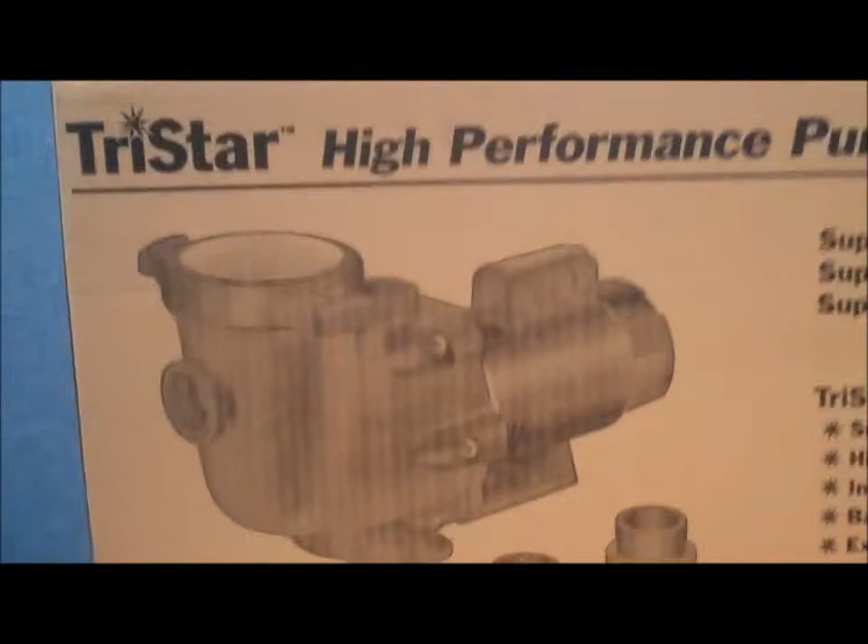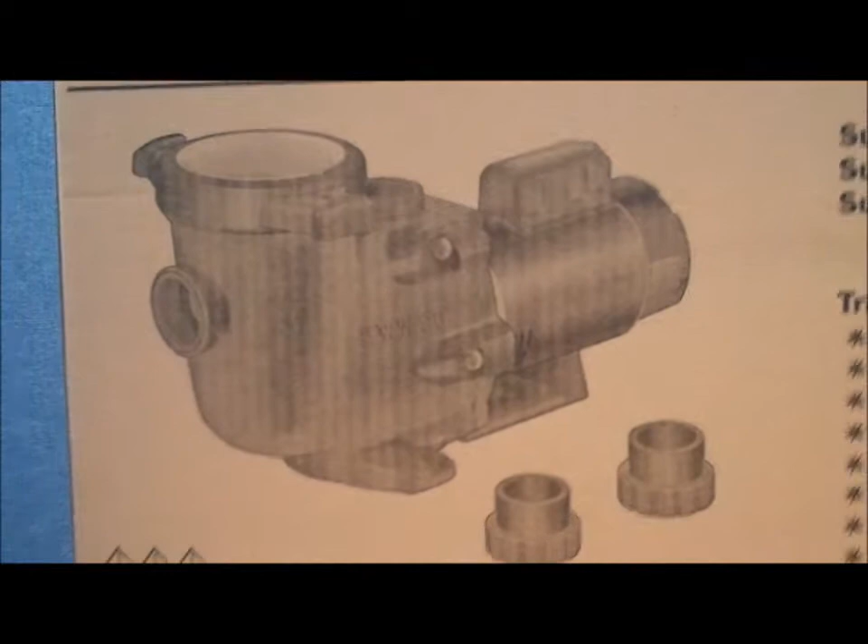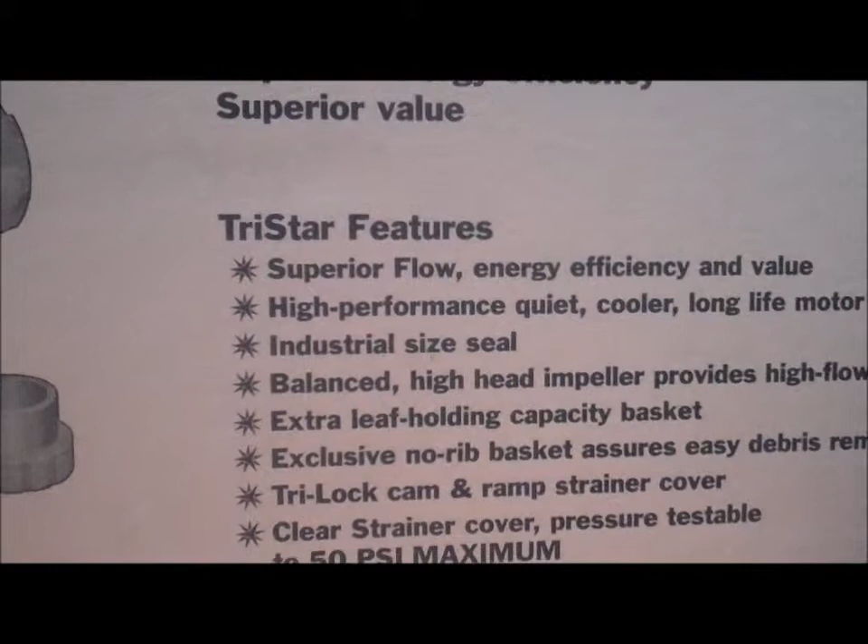Tri-Star is a unique molded design, produces high flow, energy efficiency, quiet operation, a large leaf basket, and a cam and ramp strainer cover.

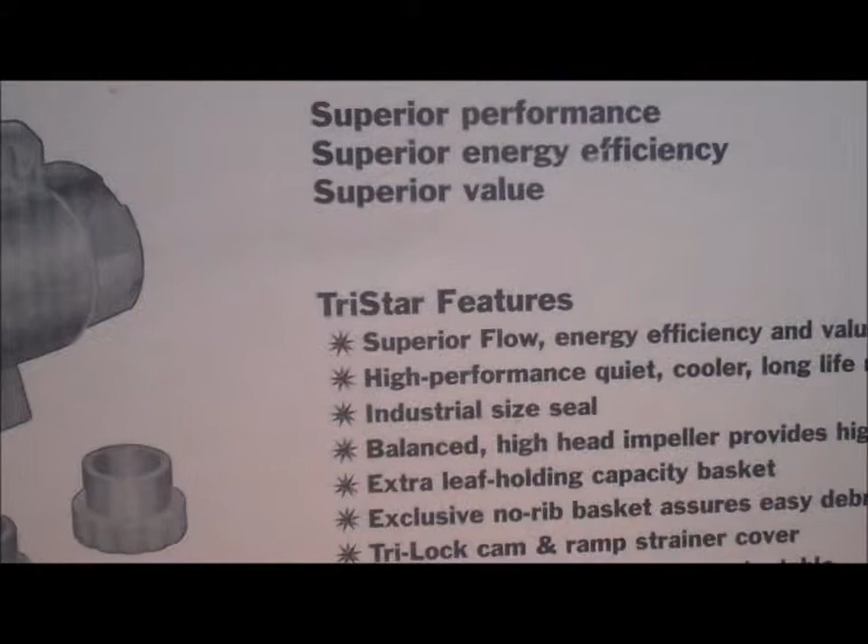The Permaglass XL is Hayward's strongest thermoplastic. This pump was introduced, I think, in 2007 and has quite a lot of installations already around the country. It's UL and NSF listed for commercial properties that require that.

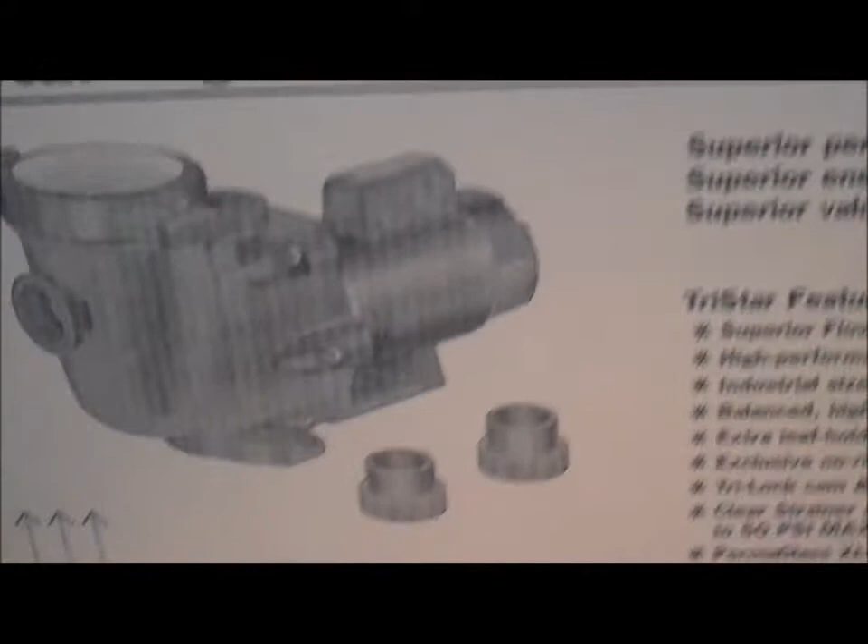This particular model we're looking at is the SP3210X15, and the 15 on the end indicates that it's a 1.5 horsepower Tri-Star. Max rate indicates that it's an uprated motor. For in-ground pools, it includes 2 unions for easy plumbing.

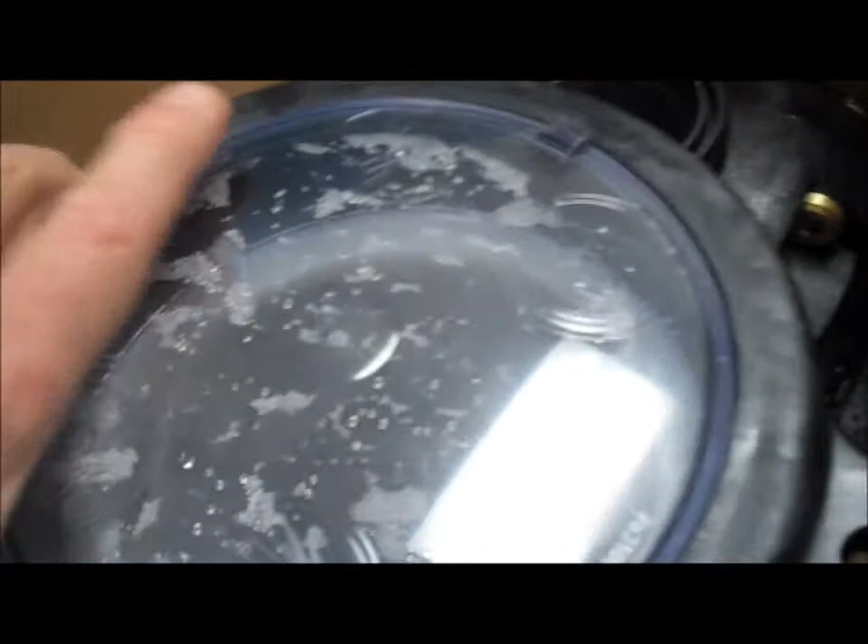Let's take a look inside. Okay, inside the Tri-Star, notice a little moisture on the inside of the lid. It's because every Hayward pump is wet tested. So if you buy a new pump, don't think it's been used, it's just been bench tested by Hayward, and sometimes there's a little bit of moisture left inside.

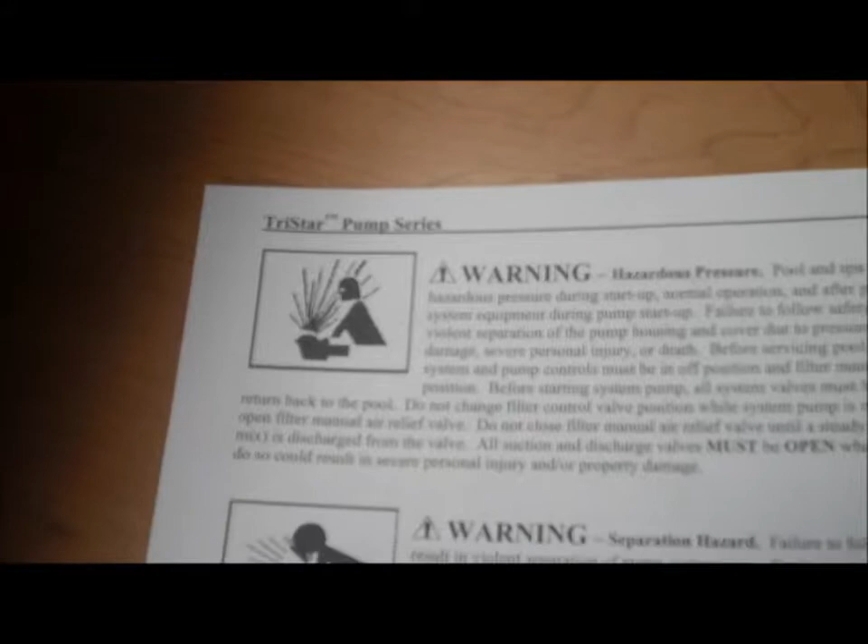First, take a look at the owner's manual for the Hayward Tri-Star. Inside, we'll start with the usual requisite warnings and cautions. There's a lot of hazards to be aware of when you're installing a pool pump - pressurized systems, electrical systems. Make sure you read all of that.

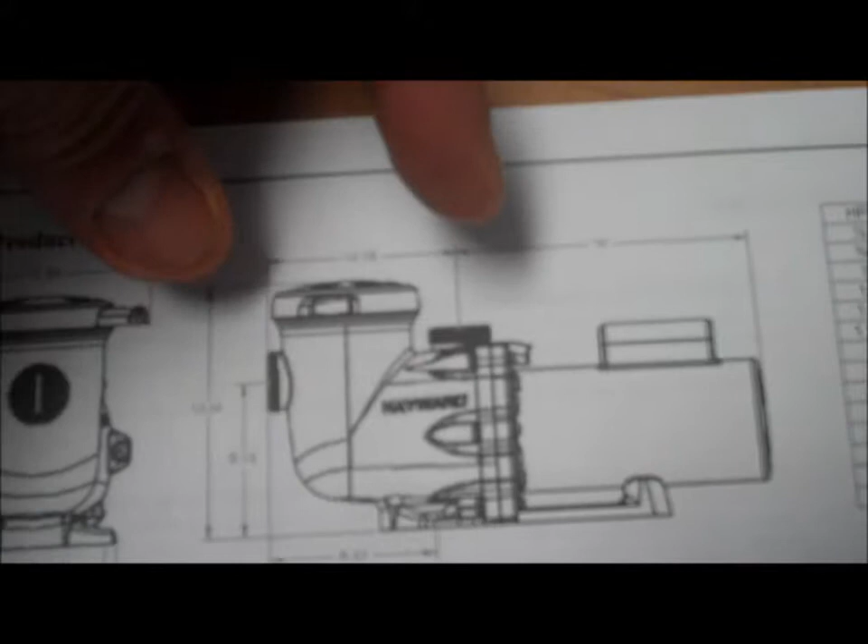We've got the product specs. The spec sheet can be very useful if you're replacing a different pump model with the Hayward Tri-Star, so that you can match the vertical height from the ground to the intake, and then match the horizontal distance from the front to the rear pipe. It's always a little easier plumbing a new pump in if you can get close to these 2 measurements of your original pump.

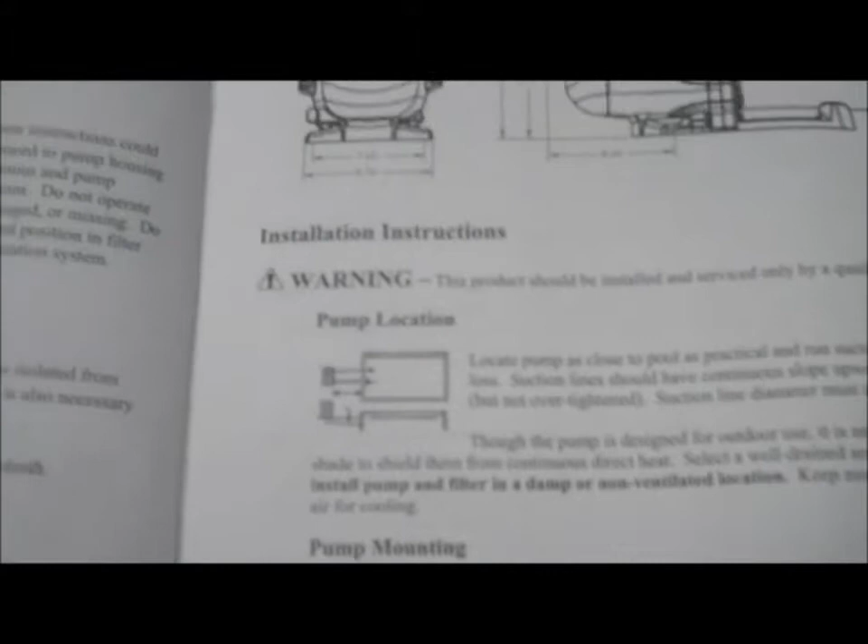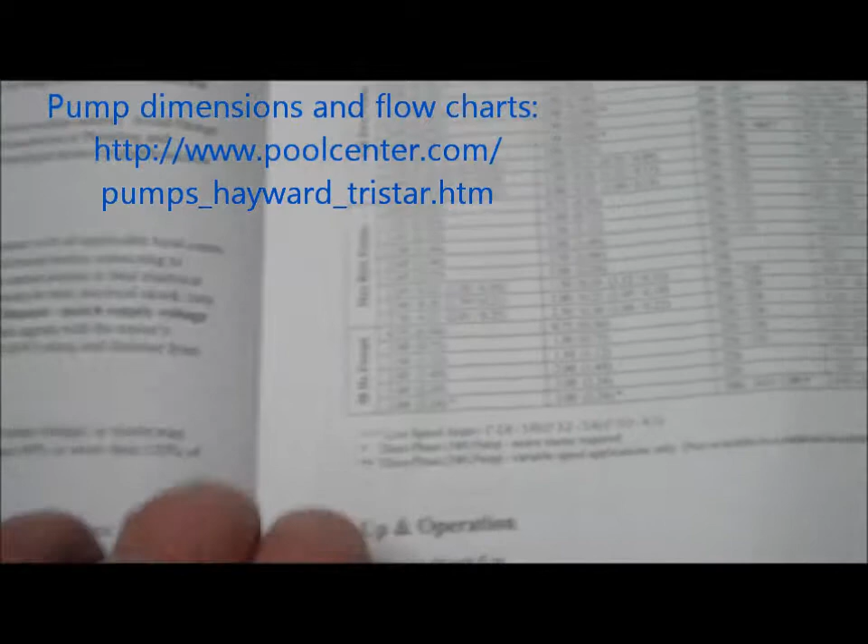And we go on to discuss pump location, pump mounting, pump sizing chart, very useful. Lots of electrical information on the amperage draw of the particular pumps. Maintenance information, winterization information.

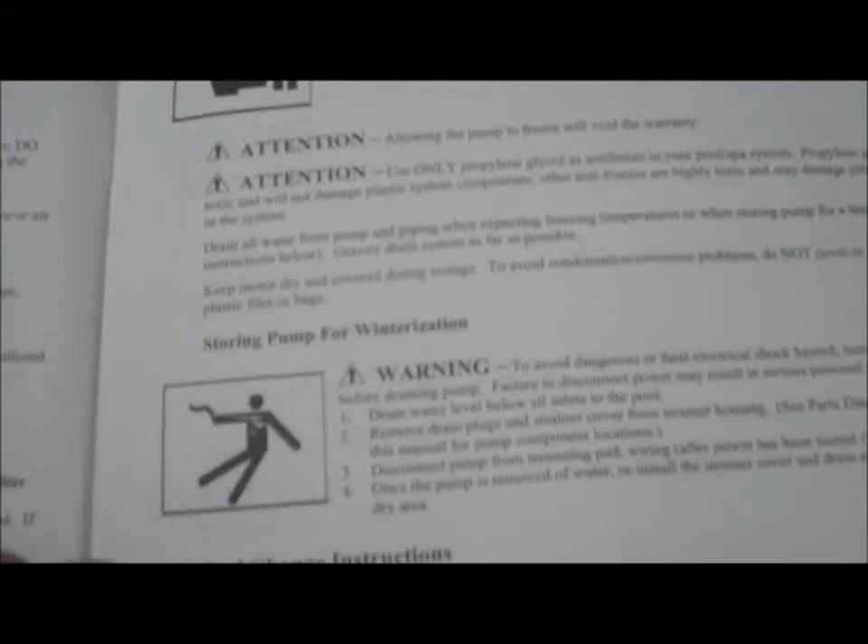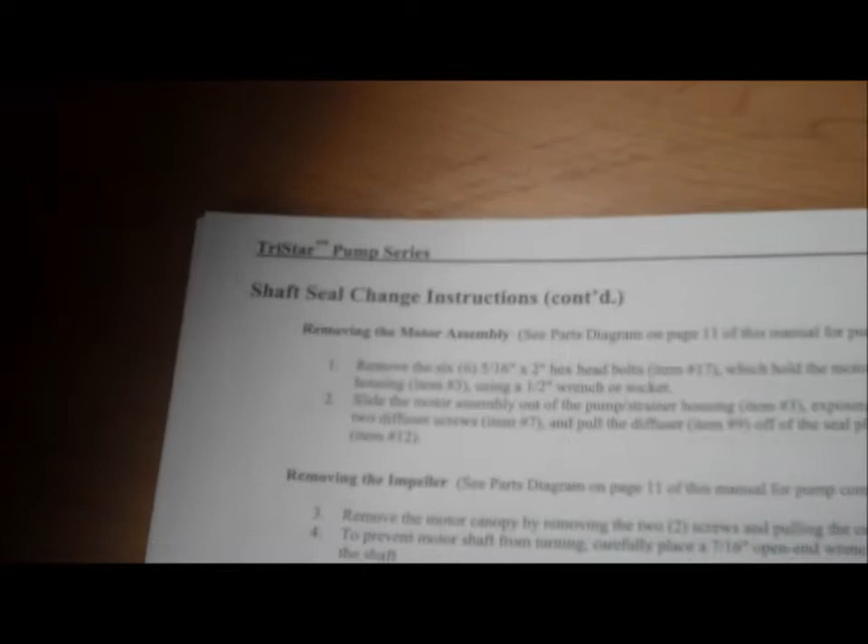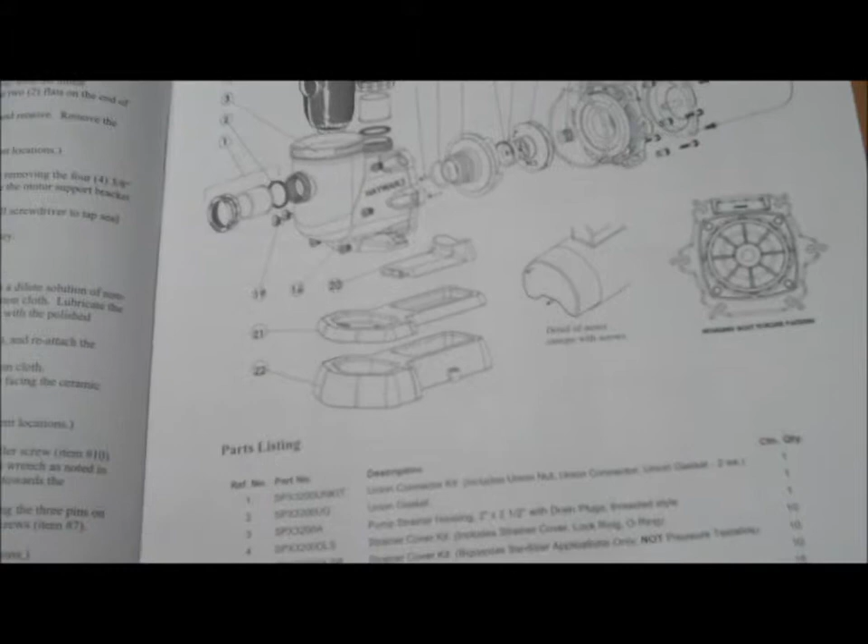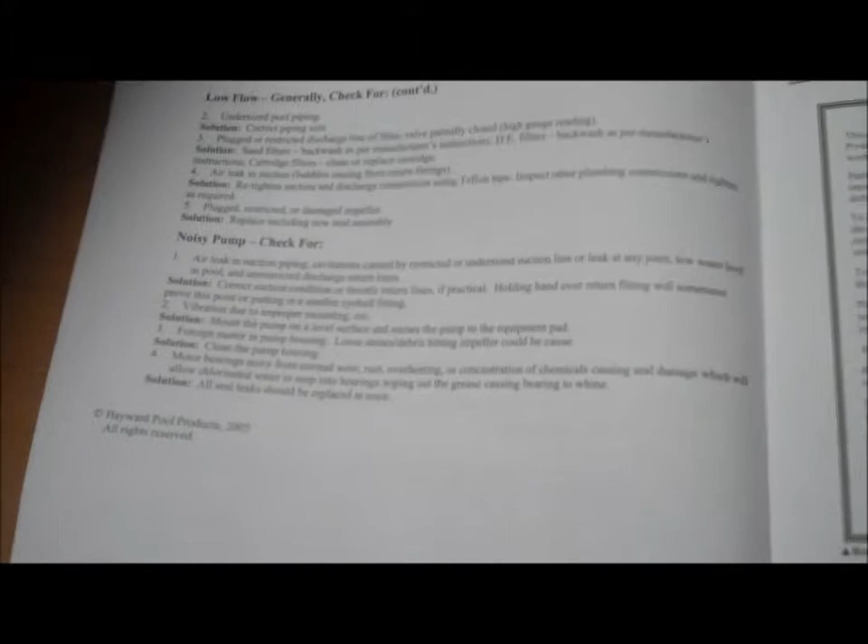We've got about 18 different parts on the Tri-Star, not too many. There's the rest of them. Troubleshooting guide for the Tri-Star motor and pump, and the warranty and the warranty registration card.

What else do we have in here? Here's the unions - 2 unions, 2-inch unions, so you'll easily be able to connect 2-inch plumbing in and out, and the unions make it easy to remove the pump for service or storage during the winter. 2-inch ports, front and rear. If you can go 2-inch plumbing, that would be recommended.

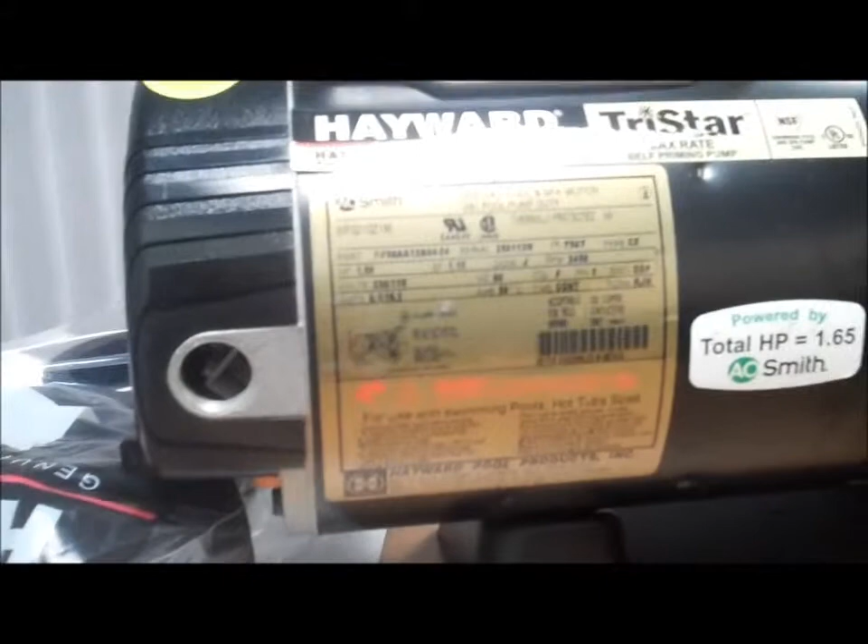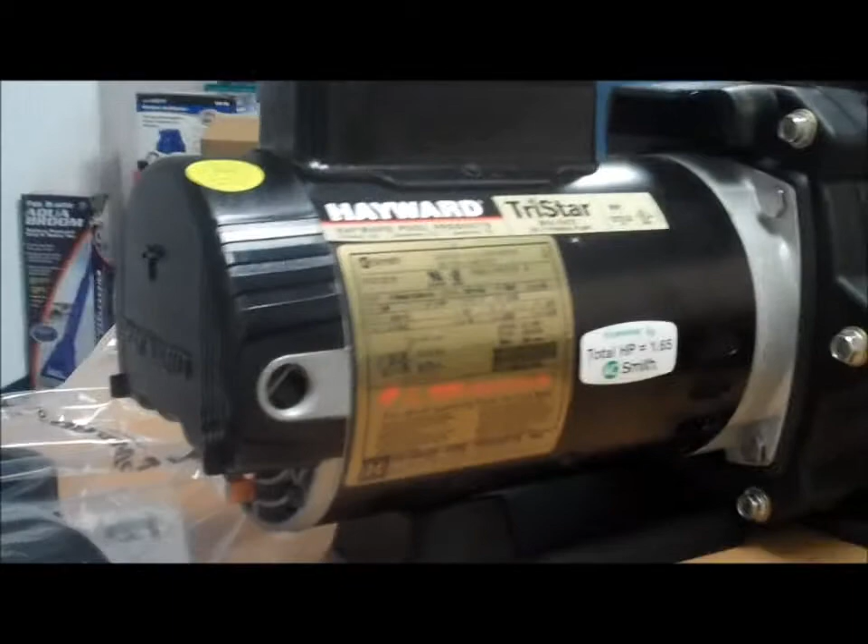This is a high flow pump, and it might be too much power for you, so make sure that you check the charts, the performance curve, and or give us a phone call if you want to make sure. You don't want to put an overpowered pump on your filter. The pump will cavitate, which means it's starved for water, or it could make your filtering inefficient or even damage your filter.

Tri-Star is a monster. Knock off the lid here. Look at the size of this basket - won't even fit in the camera, it's so big. That ought to hold a lot of debris. And yeah, there's a little water down there.

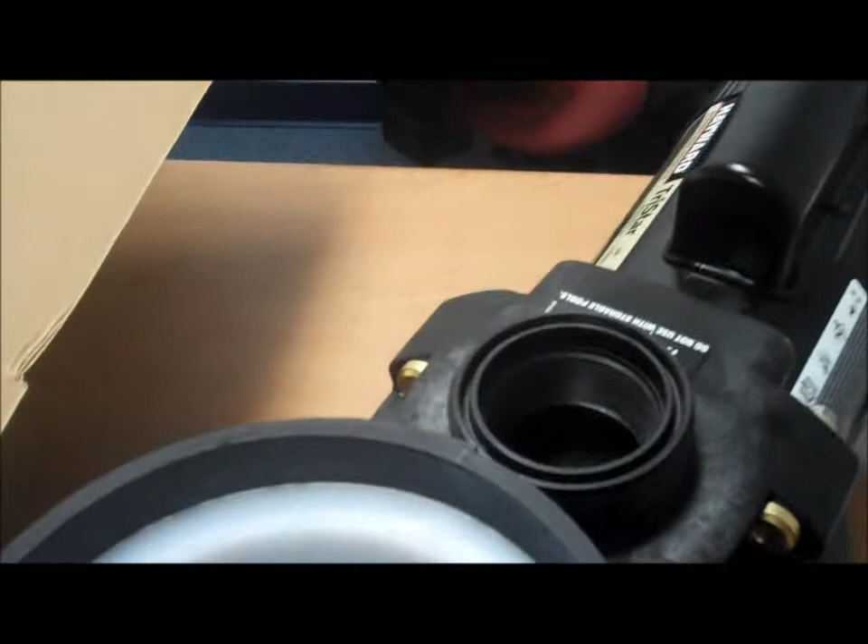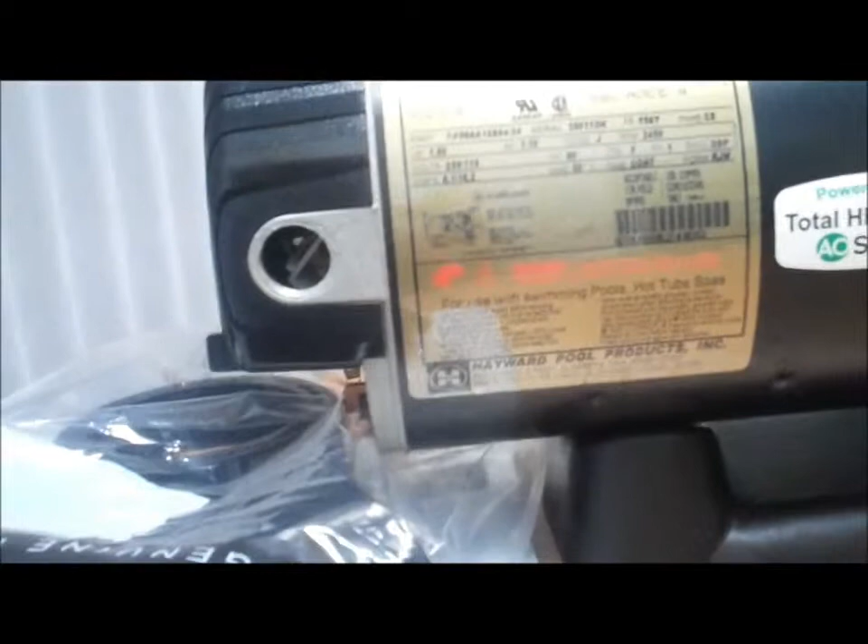The Hayward Tri-Star pump can be wired 110 or 220 voltage. It has what's called a reversible motor, and there's a very tiny diagram here that will tell you how to reverse the motor to accept 115 voltage. It'll come pre-wired, as it says here, factory wired to accept 230 volts. For 115, see the diagram. Got a little handle here.